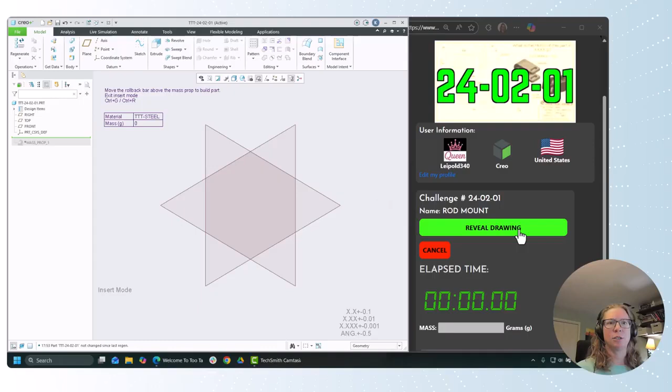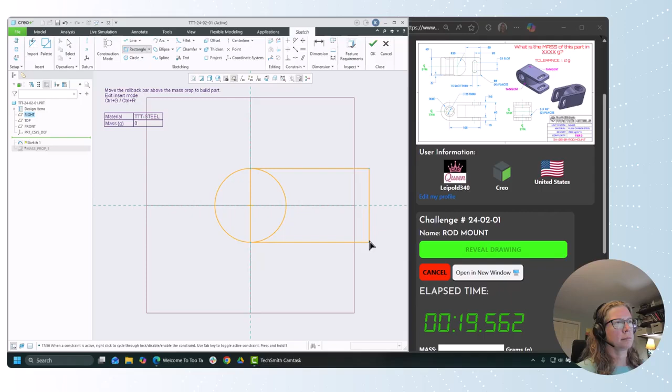All right, so I'm going to start in the front view and create a sketch. I'm going to make it the entire height, and then I'm going to use the top view to kind of trim it out.

So we'll make this 105. And make that radius, we'll make it 30. And we'll add the hole circle.

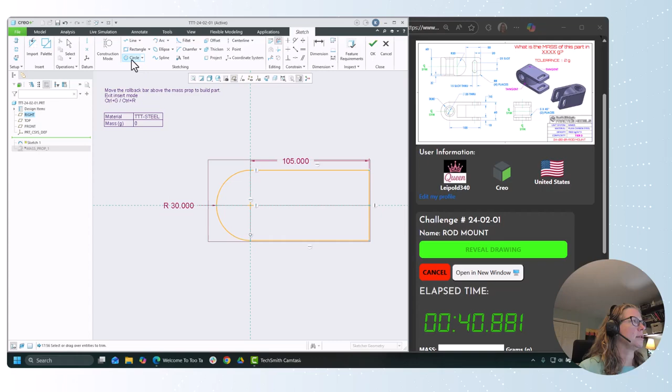Actually, before we do that, no reason to really need to use sketch regions here. We can just go with a straight extrude. So we'll make this 25 as the through hole. I'm going to leave that the way it is. That looks pretty good, so we'll hit check mark, take that sketch and extrude it, and we'll make it symmetric. The depth is 60.

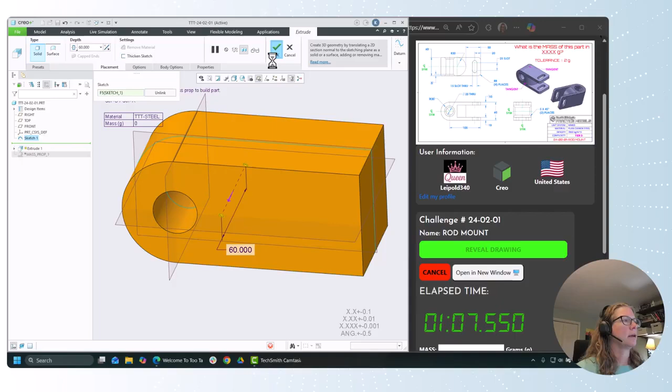All right, so this, I tried to match the color. It's actually not as bad as I expected it to be.

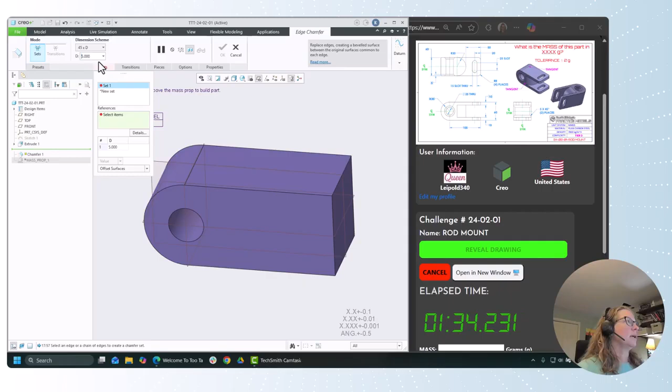Okay, so we're going to do a chamfer. This chamfer is going to be 5 by 45. I really prefer in Creo to use the 45 by D option. It shows up nice on drawings.

So we'll grab that edge, come here, and this edge. Okay, looks good.

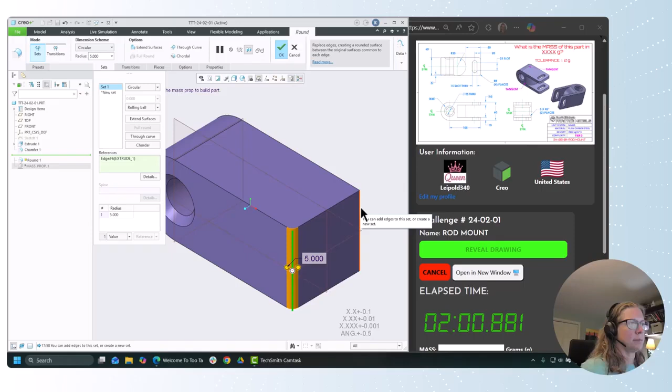All right, so now we're going to get these two. Actually, might as well grab those rounds while they're both there. So we're going to grab this one and set those to 8, so when I make the cut, I don't have to select 4 rounds.

All right, so next we're going to make a sketch on the top plane. Middle click to jump into there. I am looking at this in the center, right? So this is my clip model option.

I want to get this geometry. Okay, I see where I'm going. Let's get center point ends.

Let's see here, what if we make this one tangent to here? Let's make it coincident. There we go. And we'll dimension from the right edge to the arc, and that's going to be a distance of 50.

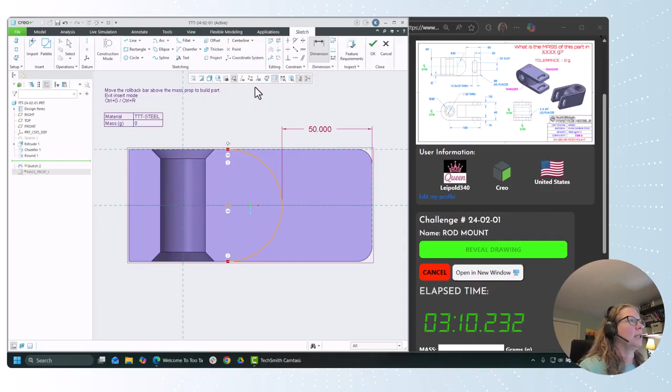I'm a little nervous about the sketch regions. I better project this, I hold down shift. That should work. Although I don't think it worked.

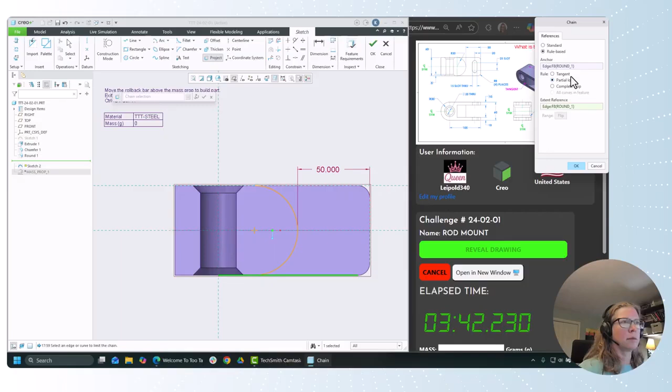All right, let's do a partial loop going from here to here. It's here. That's right.

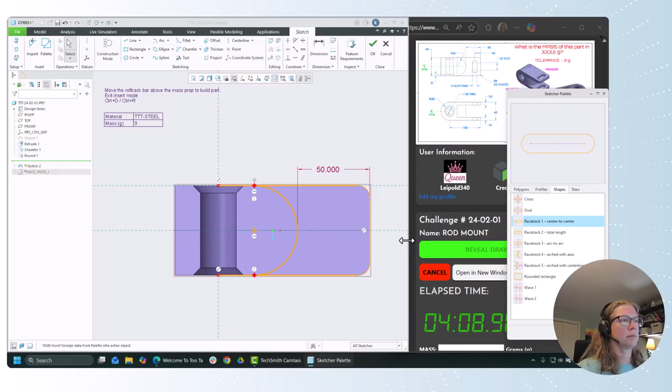Creo, if you're paying attention, I don't love the new loop. It's not that new, but I don't love it. I like the old way better. The old way is still visible when you're doing a blend, it still has the other way.

Right click. No? There we go, rotate this 90 degrees. Drag this onto here. Close.

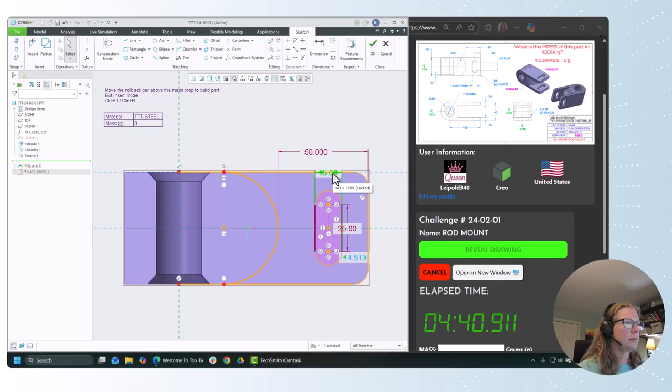All right, what else? 25, overall width is 15, and it is 20 to the center.

You may notice I spend a lot of time placing where my dimensions go, and that is because when you make a drawing, it does a really good job.

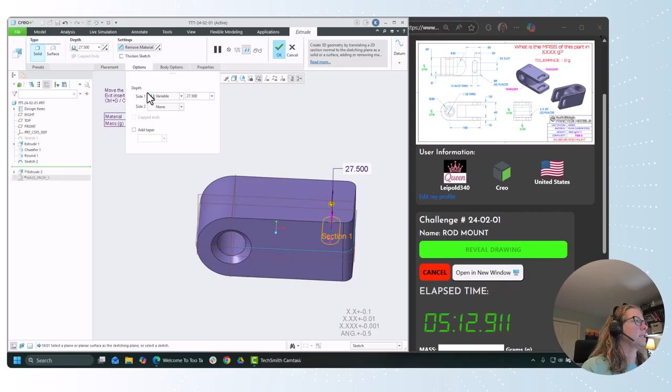Let's start with this one. Let's extrude that. Let's go remove material, options to next, options to next. Perfect.

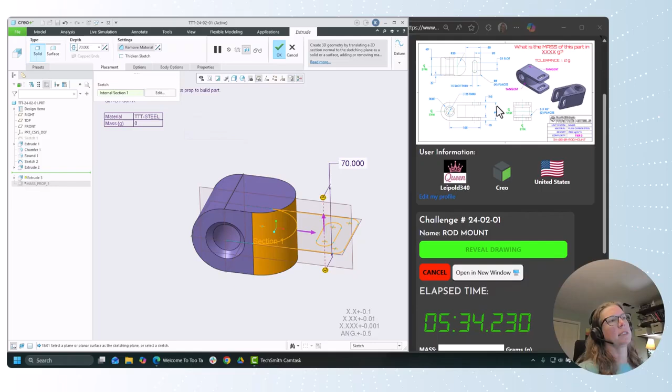And then let's grab this sketch region and extrude that. That's going to be symmetric, and that gap in the middle there, ooh, it's going to be 60 minus 20. So that's going to be 40.

All right, we got some weird looking sketches here. Hide those. Let's hide our planes. Let's see how we're doing.

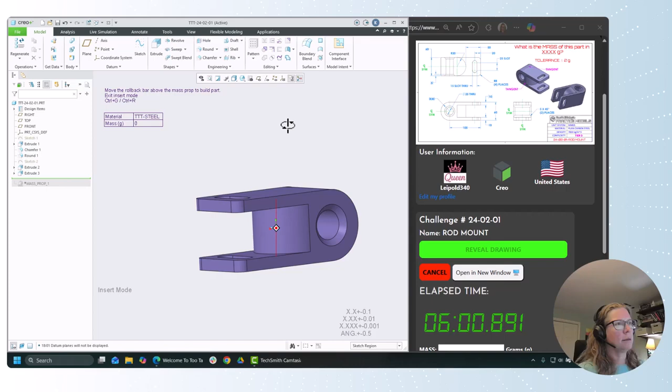Let's give it a try. And we are plus or minus 2 grams, so 2216. Nice. All right, so let's see here, what was interesting about that one?

Had to do 2 different sketches. Maybe it wasn't obvious to do the front view all the way, like solid, and then use one sketch to get rid of both of those, but that seemed to work out okay.

Did the rounds before we made the cut, so there's 2 edges instead of 3. Did the chamfer pretty early on. By default, Creo does a D by D chamfer. I prefer 45 by value just because that's typically called out in drawings.

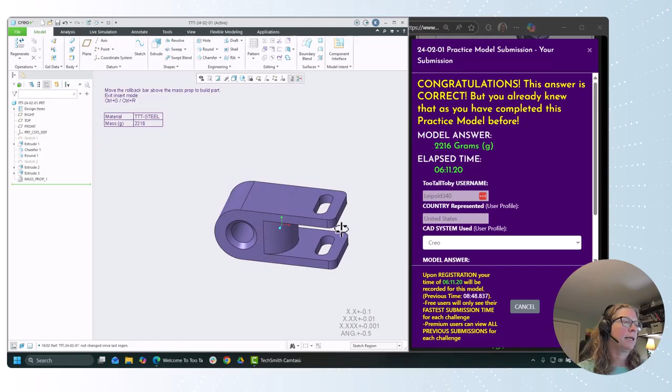And let's see here, that slot was giving me a little bit of difficulty, but was able to add it and then rotate it. And yeah, all right, we'll catch you next time.